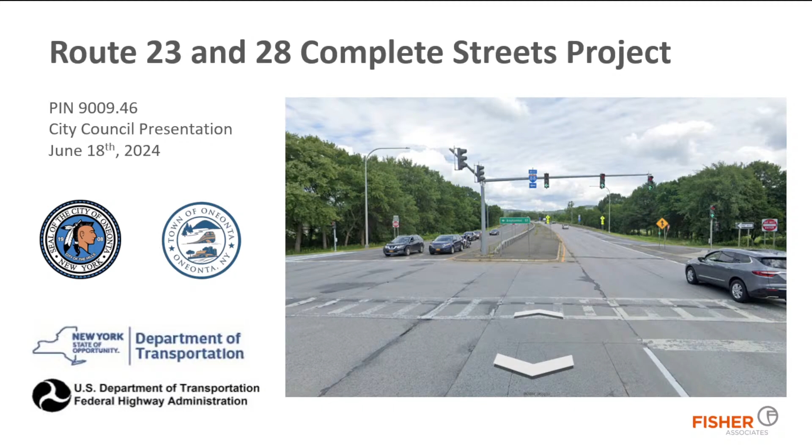Thank you everyone for giving me the floor to give the city and residents an update on this project. Greg, Chris, Judy and I have been working together for not quite a year, I think we had our kickoff meeting last July. I know the city has been moving through the SEQR process, and from corresponding with Greg, we thought it would be a good checkpoint to bring the council and the public up to speed, and give an overview of where we are, what the next steps are, and what you can expect moving forward.

So just a quick agenda: background history on the project, then we'll go over the project limits. This is a unique one - the city is the lead, but the town has a good chunk of work occurring as part of this project. So it's good intermunicipal coordination, expanding the network and making sure everything's connected as we look at pedestrian and bicycle facilities. It's a really good example of that, it's not something you typically see. I do this across the state, and you don't usually see this level of intermunicipal coordination, so it's great.

We'll talk about the objectives, what work's occurred to date, and the alternatives we're looking at. We're going to briefly talk about the New York State DOT projects. The state has been in front of the city and public regarding the roundabout project, and there's another project occurring in the town, and they all intertwine with our project. Then we'll get to funding and costs, schedule, and next steps.

From a project history standpoint, in 2021 the city coordinated with the town and put together a transportation alternatives funding application through New York State DOT. That was a federal funding opportunity that's statewide, but it also boils down to the individual regions where applications occur.

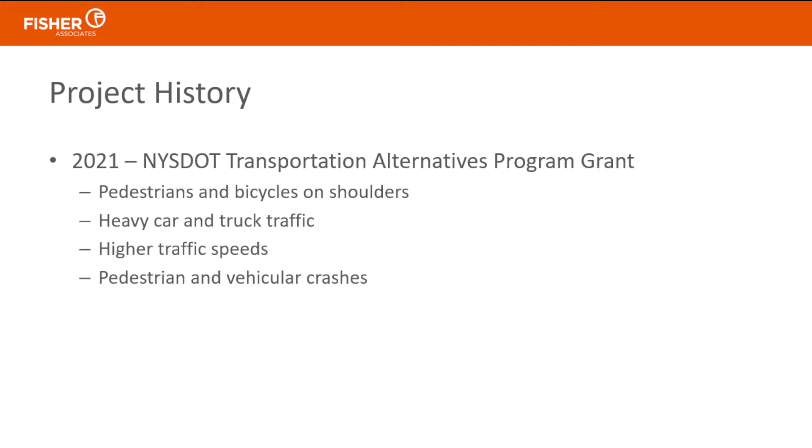The fundamental need was for pedestrian and bicycle facilities on Lettis Highway and on Route 23 and 28 within the town, making sure it was a connected corridor. Lettis Highway has very heavy truck and vehicle traffic, same with 23 and 28, and relatively high speeds. It's not a very pedestrian-friendly environment—it wasn't really designed for that back in the 60s when it was constructed. But with all the developments on the town side and the needs on the city side, there's a lot more pedestrian and bicycle traffic going between the two sides right now, so there was really a need for it.

Overall project limits—it's a little hard to see. Up here you have Maple Street where the roundabout project is, which is the north end of Lettis Highway. You have the Susquehanna River going through the middle, right along I-88. Our project limits are shown in orange, so basically we're going to mesh in with the roundabout project and carry it down to the intersection of 23 and 28.

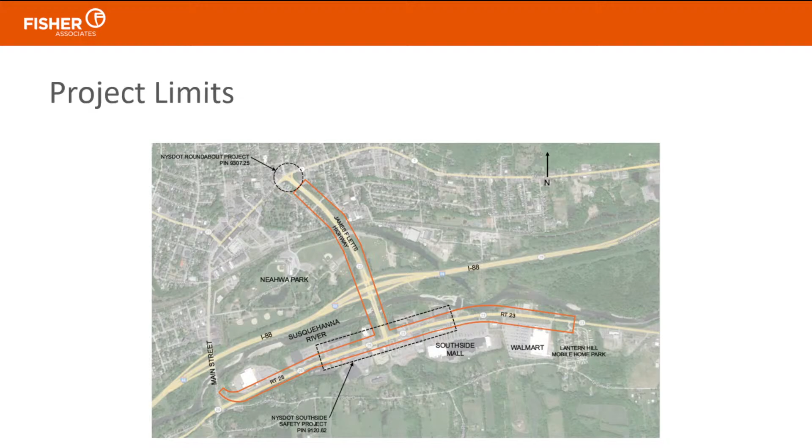There is a DOT project that's going to be constructing sidewalks right in the middle here, and also making improvements to the traffic signals to improve both pedestrian and vehicular safety—they're going to be adding a turn lane, I believe. Then bookending it on either side of 23 and 28, there's going to be sidewalk extensions out in front of Home Depot, down past Walmart, and ultimately connecting to the Lantern Village community.

Existing conditions: just over 15,000 vehicles per day north of I-88, thinking of that as kind of a break point on the Lettis Highway. To the south, you're approaching 18,000 vehicles per day. Traffic speeds on the Lettis Highway are 55 miles an hour, dropping to 30 as you get further north. On 23 and 28, it's generally 45 miles an hour.

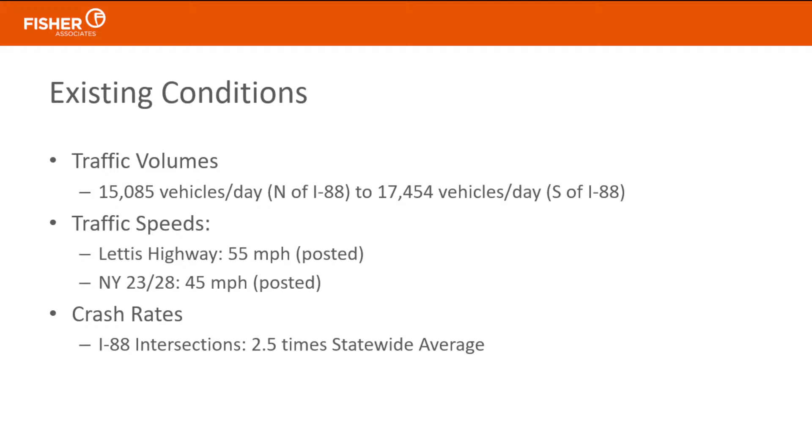It's not really a great place for pedestrians to be walking along the shoulders with speeds like that. Crash rates at the two traffic signals at the end of the I-88 ramps are roughly 2.5 times the statewide average for a similar intersection, so in the middle you have some vehicular safety issues that also need to be considered and looked at.

We've talked about the pedestrian infrastructure a lot—just two typical photos, and anyone who's driven this is well aware of what it looks like out there. Along Lettis Highway there is sidewalk and some crosswalks right at the interchange, but beyond that there's nothing dedicated for pedestrians. Same thing on 23 and 28—it's really disjointed. There are a few stretches of sidewalks and crosswalks, but not a continuous network, and that limits connectivity between the city, Neahwa Park, and downtown. There are a lot of hotels over on the town side, and on all my field visits out here, especially during the summer, let alone when there's an event up in Cooperstown, you see a lot of people staying in hotels downtown.

They're just walking along Lettis Highway, trying to get into the park or trying to get to the downtown businesses. So that connectivity is not there. That's really a lot of what we're trying to help here.

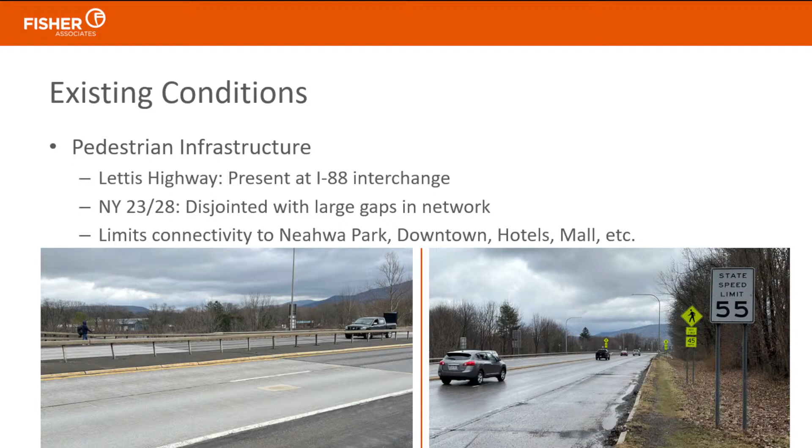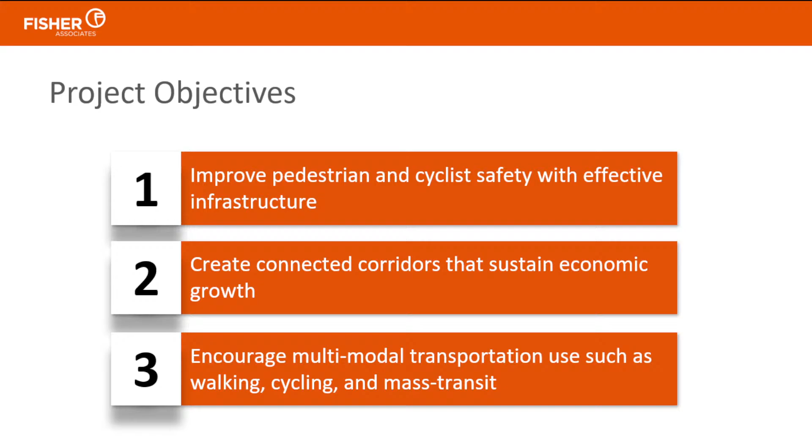So project objectives - these are key things that we look at from an engineering perspective. How are we going to identify what the alternatives are, what ultimately we're going to do, because these are the problems we're trying to solve. We want to improve pedestrian and cyclist safety with effective infrastructure, create connected corridors that sustain economic growth, and encourage multimodal transportation use - that's walking, cycling, and the use of transit.

So where we are right now is we've done an existing condition survey, collected existing traffic data, and started to go through the engineering process.

The initial alternative and proposed project put forward in the grant application, we're calling alternative 1. That was a shared use path along the west side of Lettis Highway. It was going to reduce the southbound side, between Maple Street and the interchange, from 2 lanes southbound to 1 lane southbound, and that existing lane and shoulder is where the shared use path would go.

That path is going to continue down to the 23 and 28 intersection, and then infill of sidewalks along 23 and 28 on the town side.

As we started looking into it, working with Greg, Chris, and Judy, we realized - wait a minute, maybe we step back here. There's not as much traffic on Lettis Highway as what was originally envisioned. Would it work to take all of the traffic we have now and put it on the current northbound lanes? Right now there's a paved median with a guide rail separating the 2 directions of traffic - all the traffic would get moved over to those existing northbound lanes.

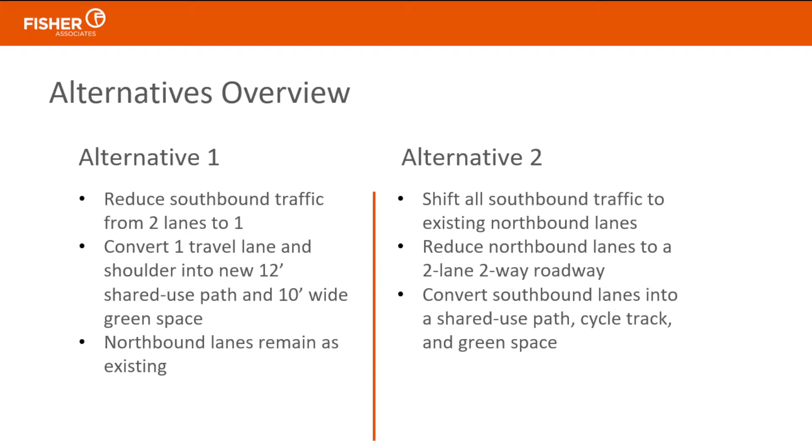So those are the 2 alternatives that we started to look at, and we are currently evaluating.

So from an overview standpoint, I talked about the 2 alternatives - that's only north of I-88. South of it, both alternatives are the same. The sidewalk network within the town is exactly the same - there's no difference between the alternatives. So the only difference, as we discussed them, is north of I-88.

South of the I-88 interchange, we're going to have a shared use path again on the west side. It's going to come across the Susquehanna Bridge, going from I-88 all the way down to that 23 and 28 intersection.

There's going to be connections into Neahwa Park. For those who've been out there right now, there's a little bit of a goat path that goes from, I guess, the westbound entrance ramp into the park over near the dog park. We would formalize that and make it a stone dust or paved path.

We're also looking at connections down to the baseball field and then also down to Fair Street, to be able to connect those communities and neighborhoods with Neahwa Park, but also give them access to whatever infrastructure is built for pedestrians and bicycles along Lettis Highway - so they don't have to walk all the way up to Maple Street and back down.

The other item we're looking at is the existing slip ramps - that's the right turn lane at the I-88 interchange. Those can present real challenges for pedestrians and bicycles because the vehicles don't stop. Part of what we're evaluating and proposing is that those are eliminated and it becomes a typical right turn lane like you might see at a downtown intersection - so all the traffic gets brought up to the traffic signal, all the traffic stops, and the pedestrians and bicycles have their own signal as they're crossing.

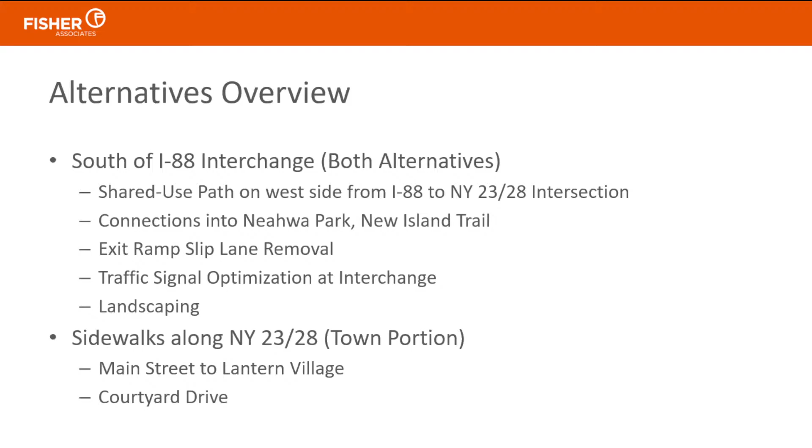We're also going to have landscaping that we're looking to add, and lighting if the budget allows. So the sidewalks along Route 23, in the town portion, generally run from Main Street all the way to Lantern Village, and then also an extension down Courtyard Drive.

To give you a visual for alternative one, I have a plan view that gives a bit more of a zoomed out look. This is looking north. These are the existing northbound lanes, so one or two lanes north, just as you have now.

Southbound, though, there's that multi-use path that I discussed. There'd be a planted median where stormwater could get collected, and a single lane going south, basically between Maple Street and I-88. That's a sectional view showing two lanes north of the shoulder, and then a single lane south.

The other item we're also looking at, if the budget allows, is modifying the existing median that's out there. Right now it's asphalt with galvanized guide rail. What we're looking at is replanting that, making it a grassed, landscaped area, again to help that gateway feel and make it less of a transportation corridor and more of a gateway into the city.

So this is an overall plan view. Right here, I-88, you have Neahwa Park. Up to the right is where the roundabout project meets in, so really this is the limit of what we're looking at for alternative 1, for that sidewalk or shared use path on the west side of Lettis Highway.

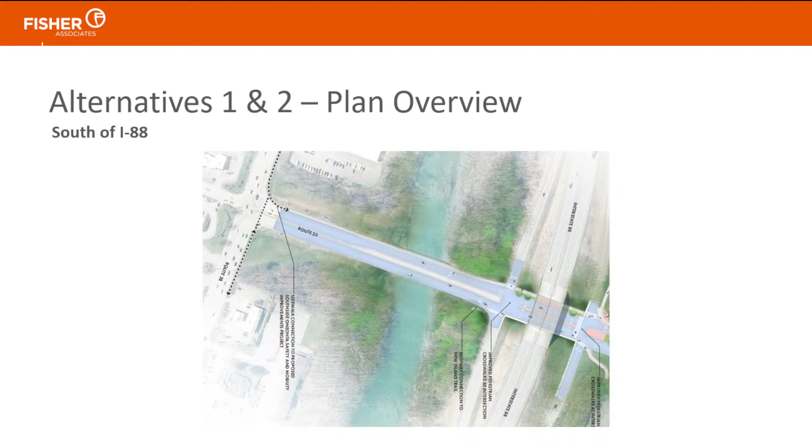So I talked about the New York State DOT projects. There's two of them. There's the Maple Street roundabout. So that's continued coordination between projects. I think we've had at least 2 or 3 full team meetings with both our engineering team and the state's engineering team, talking about design features, how they mesh together, and schedule.

Our project, the message here is that our project will integrate with whatever they're building, and vice versa. We're going to complement each other. They're going to work. We're not going to get to 2 years from now and the alignment's not going to work. Everything's going to be adjusted as we need to make sure that they both work. The construction schedule on that may mirror what we end up doing.

And I'm jumping ahead a little bit, but we anticipate going to construction next spring, that being a 1-year project. They may be on the same path and same schedule as that. And so that may force some discussions as far as, well, do we make this one big project, instead of having 2 separate projects, 2 separate contractors? Do we make it one big project and get it all done at the same time, same contractor, same inspection staff, same administration?

But that's a conversation that came up a couple months ago with the state, and we all agreed, well, let's track it, let's touch base later this year, see where we are, make sure we're still on the same schedule.

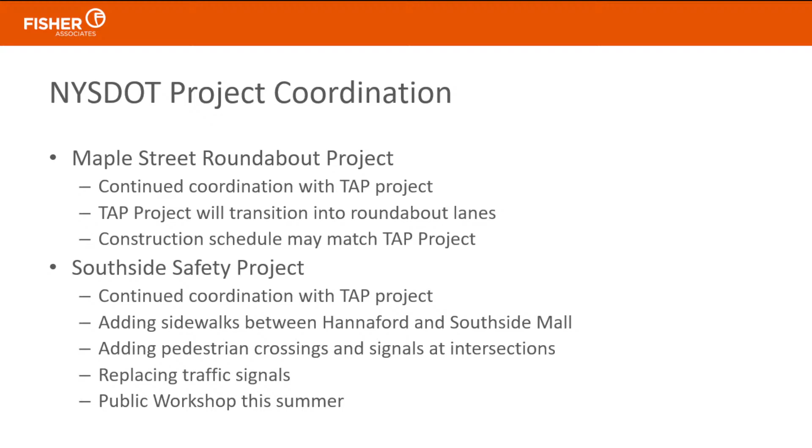So alternatives, in terms of the next steps. Where we are is we prepared what's referred to as the draft design approval document. That's really the preliminary engineering, making sure that you're building the right project. It doesn't have the nitty-gritty detailed engineering worked out yet, but it makes sure you've looked at all the environmental issues, if there are any, made sure you're within the costs, and make sure it works - that you're not moving forward with something that's not buildable and not going to work.

That's currently under review by DOT. We're awaiting comments. We submitted alternative 2 as the preferred alternative, as the one we wanted to move forward with to detailed design. So the next step is, okay, what are DOT's comments? Do they change any of our direction here? Do they change our alternative? Is it going to add costs or anything else like that? Or is there a reason that they don't like one of the alternatives?

This being a state highway, the state has ultimate authority and final approval on what happens here. So if the state is not a fan of alternative 2, alternative 1 may be the direction we have to go. That's all going to get hashed out here in the next month and a half, I'd say. We should be receiving their comments by the end of this month, fingers crossed. I think we'll have a really good idea of where they stand formally once we get those comments.

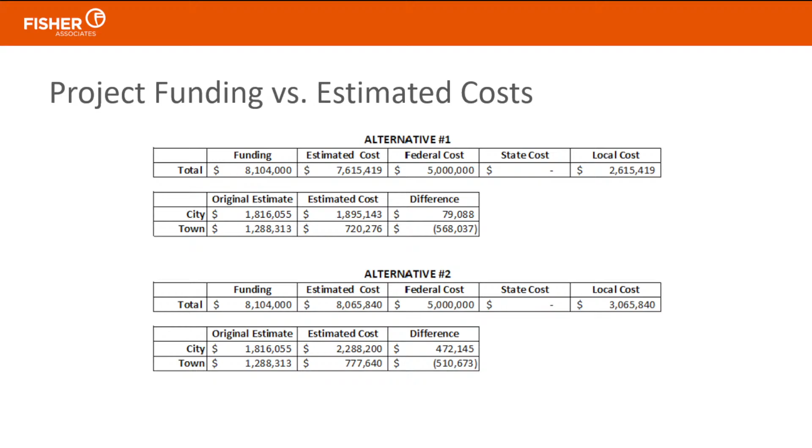So from a schedule standpoint, we're having this meeting. We anticipate having another public meeting, citywide, I'll say a bit more of a workshop format where the posters will be on a table and people can come in and ask questions. We are presenting at the town board on July 10th, so they'll be getting a very similar presentation. So that's where the public involvement will be this summer.

Once we get to that design approval step that I referenced, then we'll start the detailed engineering. We anticipate that being later this summer through the fall. And then we're hoping to advertise for construction either late December or early January, to make sure we get out in front of some of the other projects that are out there, get a good contractor while they're hungry, and give us a better bid price. Construction starting after thaw in the spring, and then wrapping up in the fall.

With that, any questions? Council, questions? Don?

So you said during the presentation that there was both heavy traffic and not a lot of traffic. Which is it? It's heavier traffic. It was built like a lot of interstates back in the 60s with an assumption of a lot of traffic and huge growth. That was not met. This happens all over the state and the country, where projections aren't met. But we do have heavy vehicle traffic, and because there's not a lot of congestion, it's heavier than you'd want with someone walking along the shoulder.

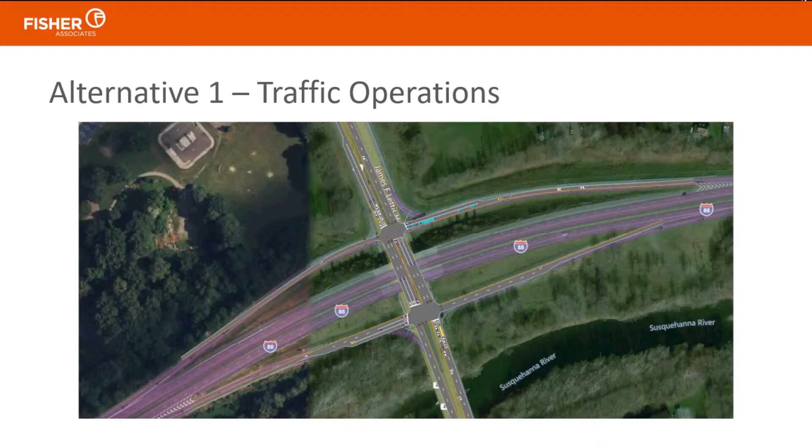I'm gonna just agree to disagree, because even just this morning there was a family pushing a stroller with 4 children in tow when I went over to Southside. There were at least 3 people in McDonald's uniforms walking to McDonald's, and when I got my Dunkin' right before I came, there were people leaving work and people walking from Hannaford towards the highway. So just in those 2 instances today, I saw more people than you were able to catch out there in that moment. But it's a time period, right? You're only out there for a certain amount of hours. I can personally attest that there's more people biking and walking out there.

Elaine? Yeah, I was just gonna add something similar, that I don't think it's about the total number of pedestrians, it's the overall safety, because they're the most vulnerable. And I understand that this project is also aimed at improving pedestrian safety as well as vehicular safety, if I understand correctly. That is true.

We do have people who walk from Lantern Village, and they walk from Walmart and come down into our downtown, many of them having children, and from the trailer park behind, they mostly walk to Walmart and others on the south side.

They cut through that path in the back of Neahwa Park, and that was created a lot from that traffic, from people from those areas.

So what this brings up, as far as I can see, I think it's a great idea to improve pedestrian safety, but it's not a good idea to reduce the number of lanes for motor vehicle traffic.

Katie? I just wanted to say that I agree with Shannon. I know people who personally have walked because they don't have a car, or their car's in the shop, from the city out to south side where they work. People who have to walk to work don't have a choice about the weather.

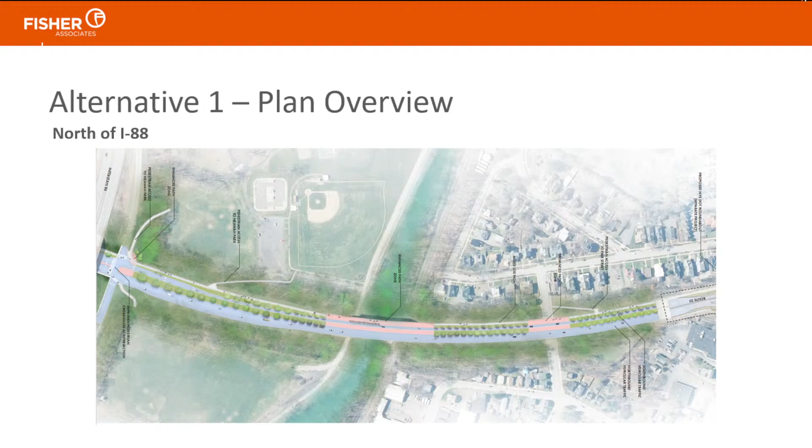And Martine. So we have Martine Kemmerbeek, the Airport Commission Chair, and he's going to take us through an airport capital improvement plan. Thank you, Mark, for the introduction.

So tonight I would like to talk about the ACIP, the Airport Capital Improvement Plan. Every airport in New York State, and I believe in the country, has one of these that outlines the projects that will be done. There are two projects in particular I would like to talk about today. I'm not sure who's controlling the slides, but okay, thank you, Terry. If you could go to the next slide, please.

The first project is the on-airport obstruction clearance. This is more of a maintenance type project that we need to do. What we'll be doing is taking trees down on around 14 acres on both sides of the runway. That's going to improve the safety of the airport—in case an airplane is a little too low, they're not going to hit the trees. There's typically a glide path around 3 degrees, and we make sure far below 3 degrees is also clear.

Those trees will be removed, and then the land will be grubbed, meaning all the stumps will be removed and it will be smoothed out so we will not have any more trees growing.

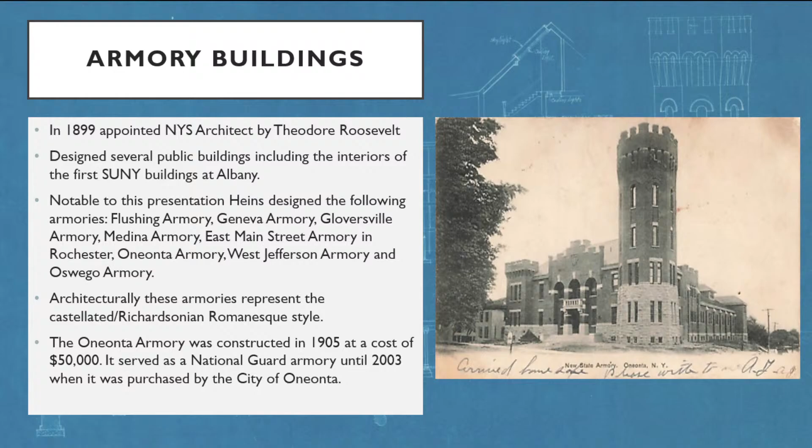This armory replaced the original armory, which you can see right here. So the armory we have now is a second rendition, a larger armory. This first armory was torn down to build the 1905 version.

Our armory's on the National Register because it fits this really weird criterion for its association with American military history in general and the National Guard in particular. Part of this criteria is associated with the idea that the National Guard is kind of a bulwark of the American military system. It has cultural importance because of that. It's a weird criteria, but that's why it's on there, not because it's especially architecturally important, despite the easy argument now that it probably is architecturally important.

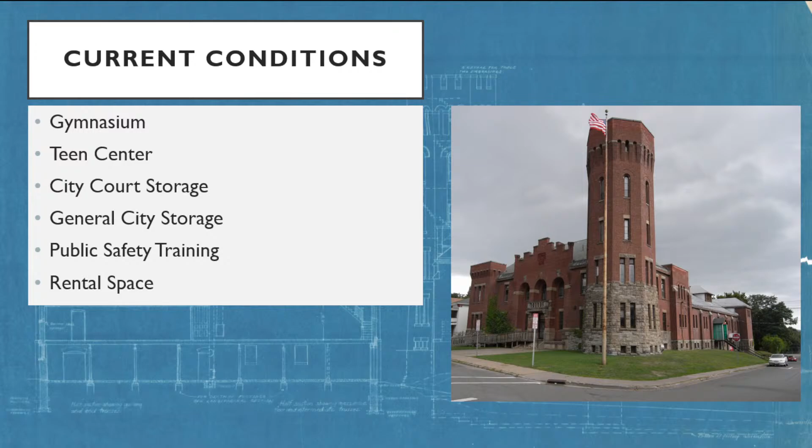So the current condition: we have a gymnasium, we have a teen center, we have city court storage, we have general city storage, we have public safety training space, and then we also rent areas of the armory for use, technically.

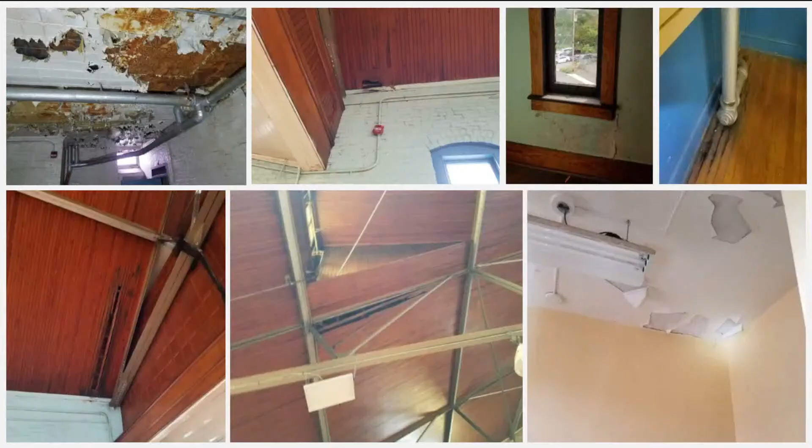These are some images of the current conditions that were noted by the structural engineer. As you can see on the top left, there's failing paint in the basement due to moisture. The gymnasium roof, because there's roof leaks throughout that area, you can see where that beadboard ceiling is deteriorating. Most of what we have is water infiltration coming into that building. And when water gets in, it's always bad. So most of these images, and most of the images throughout the report, are due to water coming into the building.

So included in this report was a use and cost estimate. Part of this was developed by looking at uses in the building code. So in the building code, we have business uses, public assembly, residential. Depending on those uses, it triggers different code requirements for how buildings are retrofitted.

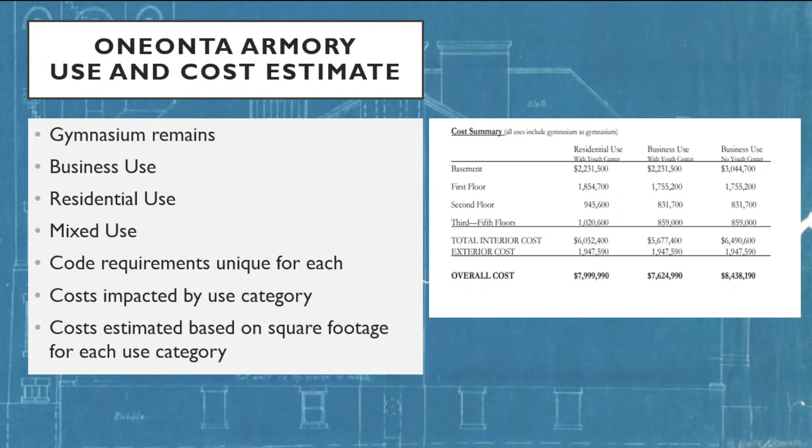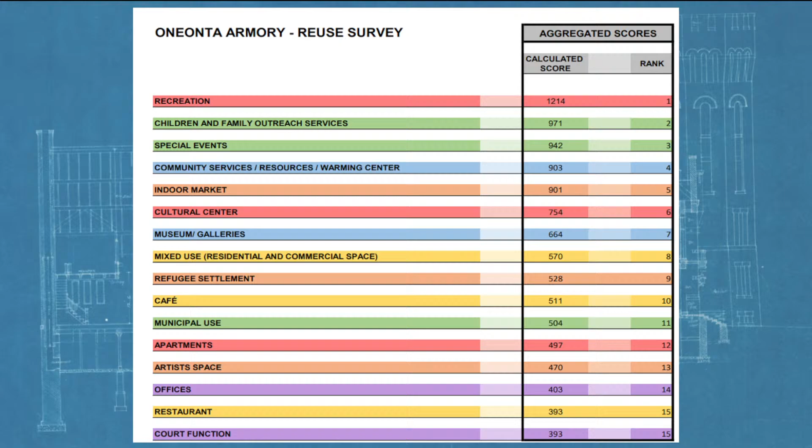Next slide. As part of this condition survey, we did a use survey that was attached to how that cost estimate was created. If we look at the reuse survey, the top four uses were recreation, children and family outreach services, special events, and community service resources and warming center. Those were the big themes already going on in that building, and that's where those cost estimates were generated from.

Go ahead and click to the next slide. So conclusions: the building is structurally sound. The architect and the structural engineer said basically the building is what it is. It needs maintenance, but it's not in any imminent danger of collapse or any sort of failure.

A roof repair or replacement is listed as one of the major projects needed on this building, and this will be true of any historic structure. The roof is a critical part of keeping these types of buildings together. Repointing is another critical part that prevents the delamination of stone and failure of the brick. They recommended replacement of the front ramp, not only because it's historically not sensitive to the structure.

Also, in order to accommodate better ADA compliance, the front ramp will need to be replaced. The east fire escape is in a state of failure, so they recommended replacement of that, along with further review of the tower stairs and framing. Those are old structures that have met their life expectancy. The way they were built at the time is not what we'd consider best practices in current construction.

Sprinkler is also going to be a major component of that building. By adding a sprinkler, you allow much greater options for what you can use that building for. And then you have generic repairs noted - plaster, woodwork, ceiling - just generic interior maintenance issues.

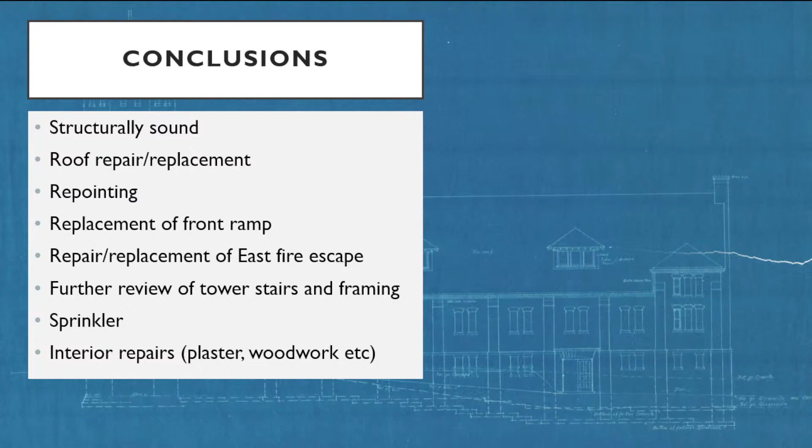All right, next slide. So historic preservation tax credits - obviously the city isn't really going to be able to take advantage of these, but in the future, if we were to partner with a private developer, sell the building, however this plays out, you have federal historic tax credits, up to a 20% tax credit on your income taxes. You can couple that with the state, which is another 30%. And then there's a local law called 444A, which is basically a deferred local tax, like your real estate, where you can offset your improvements over up to 10 years. You can couple all of these together to create a funding package or at least an incentive to do some of the improvements needed on this building.

When we see that happen - the Ford block, obviously Springbrook's taking advantage of those, Chip Klugo's obviously taking advantage of those - we've seen those tax credits really effectively work in our downtown.